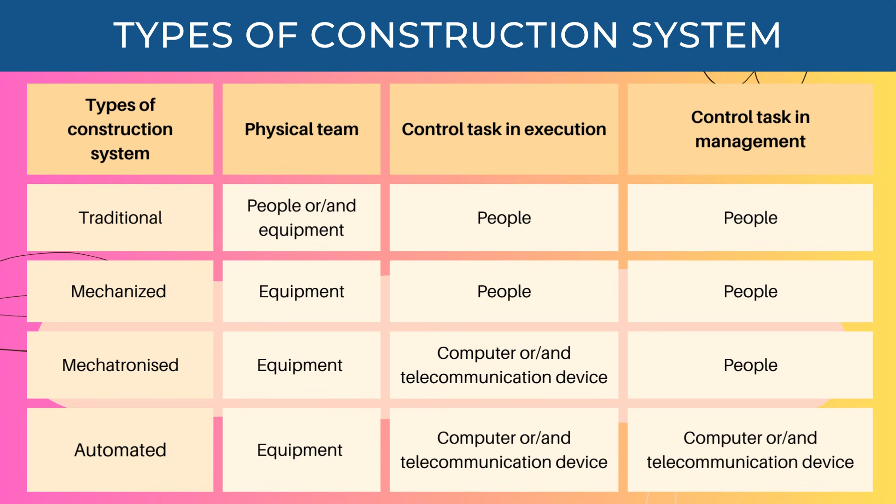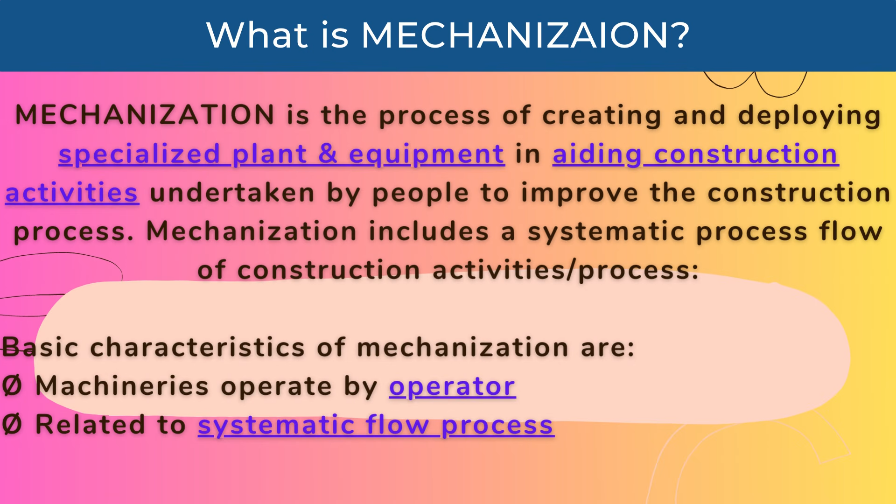What is mechanization? Mechanization is the process of utilization of specialized plant and equipment in aiding construction activities undertaken by people to improve the construction process. Mechanization includes a systematic process flow of construction activities. Basic characteristics of mechanization are: 1. Machineries operated by operator. 2. Related to systematic flow process. A systematic flow process is a way to visualize each subsequent step that your team goes through when working toward a goal.

What is automation? Automation is defined as a self-regulating process performed by using programmable machines to carry out a series of tasks with no or little people intervention in their normal operation. Basic characteristics of automation are: 1. Machineries are operated by programmable machines with no or little people intervention. 2. Related to self-regulating process. Self-regulated processes have built-in feedback characteristics that cause the process to tend towards self-regulation. An example is batching plant auto operation, grading by motor grader by new grading system of a self-regulating process.

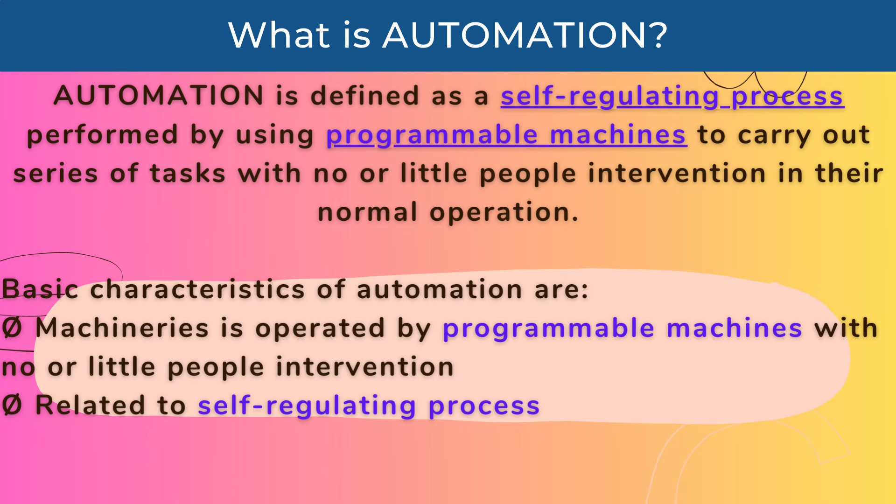What are advantages of mechanization? 1. Improve quality. 2. Improve safety. 3. Fast execution. 4. More productivity. 5. Increase profit. 6. Reduce construction cost. 7. Reduce manual work. 8. Reduce wastage. 9. High feasibility.

Friends, we will explain in depth about productivity, cost, quality of work and many other details for construction plant and machinery in upcoming video.

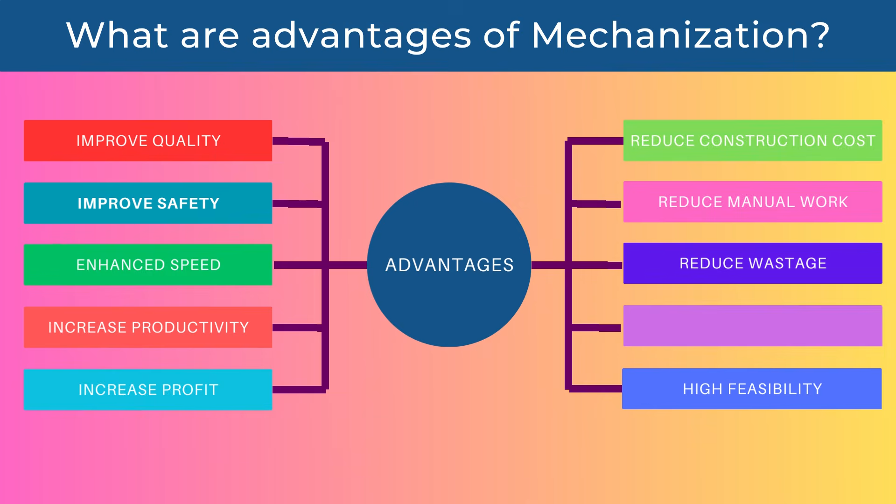Let us come to the topic. Type of construction plant and equipment. Construction equipment can be divided into two major categories: 1. Productive equipment and 2. Support equipment. Productive equipment describes units that alone or in combination lead to an end product: haulers, loaders, rollers and trenchers, etc. Support equipment is required for operations related to the placement of construction such as movement of personnel and materials: hoists, lighting sets, vibrators, scaffolds, etc. Project goal is to select the equipment combination that yields the maximum productivity at the best or most reasonable price.

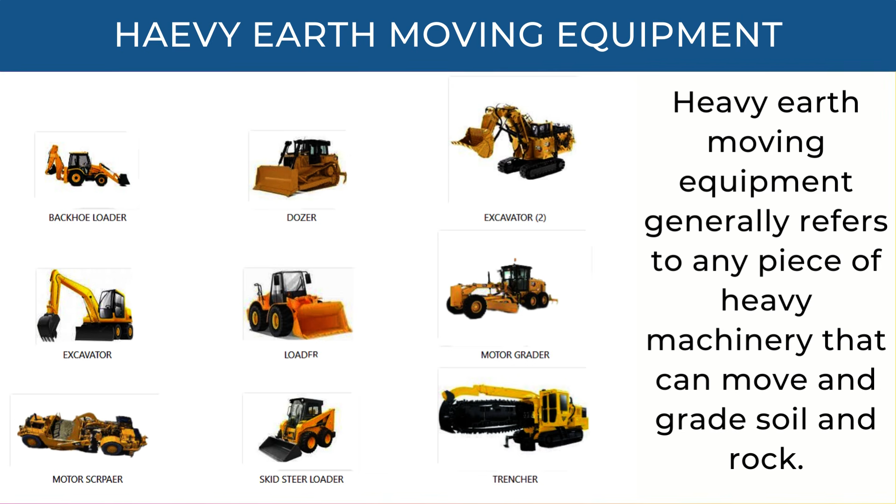Types of productive construction equipment. Productive construction equipment is divided into the following categories. 1. Heavy earth moving equipment. Heavy earth moving equipment generally refers to heavy machinery that can move and grade soil and rock. Example: backhoe loader, dozer, excavator, loader, motor grader, motor scraper, skid steer loader, trencher.

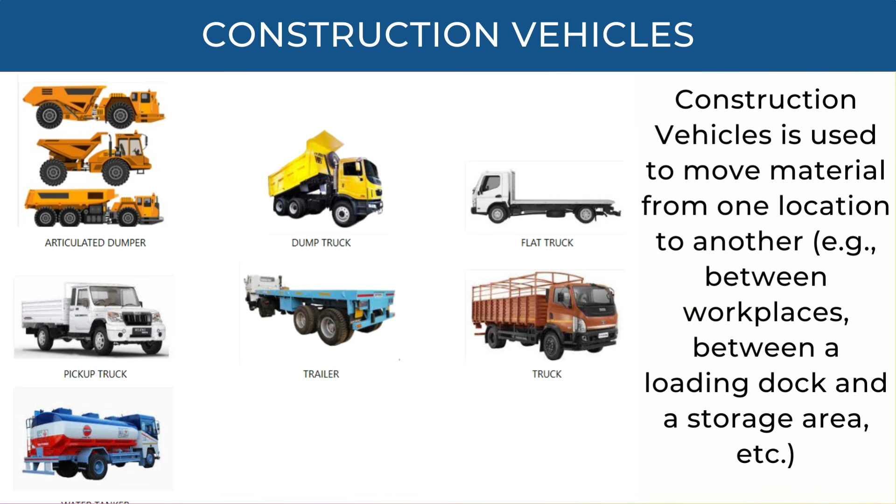2. Construction vehicles. Construction vehicles are used to move material from one location to another, for example, between workplaces, between a loading dock and a storage area, etc. Example: dump truck, articulated dumper, flat truck, pickup truck, trailer, water tanker. 3. Lifting equipment. Lifting equipment, also known as lifting gear, is a general term for any equipment that can be used to lift and lower loads.

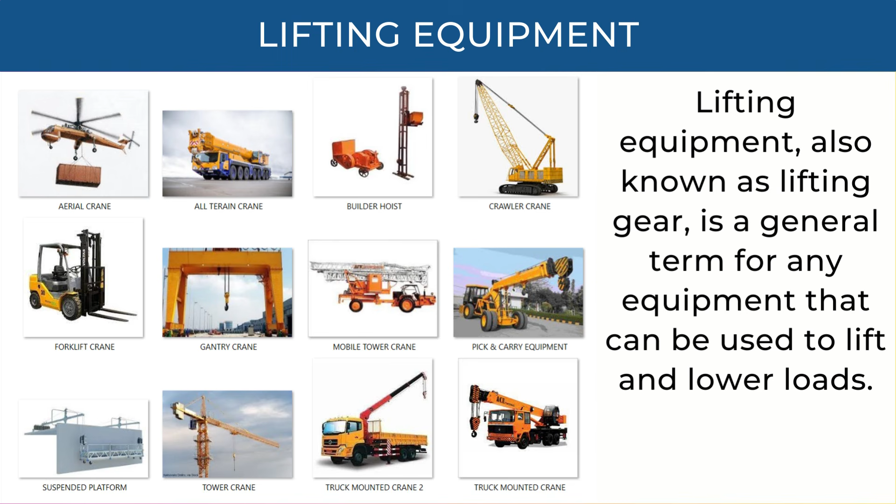Example: aerial crane, all-terrain crane, truck-mounted crane, crawler crane, forklift, gantry crane, tower crane, mobile tower crane, pick and carry crane, suspended platform, builder hoist.

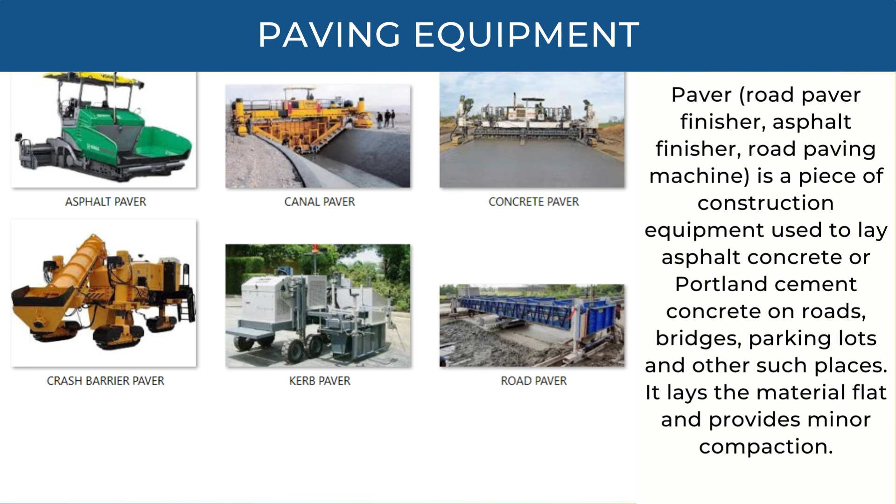4. Paving equipment. Paver is a type of construction equipment used to lay asphalt concrete or Portland cement concrete on roads, bridges, parking lots, and other such places. It lays the material flat and provides minor compaction. Example: road paver finisher, asphalt finisher, concrete paver, drain paver, canal paver, crash barrier paver.

5. Compaction equipment. Compactor equipment is a device that applies downward pressure on dirt, soil or gravel to compress the ground and fill in air pockets. There are 3 basic types of compaction machines: rammers, vibratory plates, and rollers. Example: soil compactor, tandem roller, pneumatic tire roller, walk-behind roller, plate compactor, rammer.

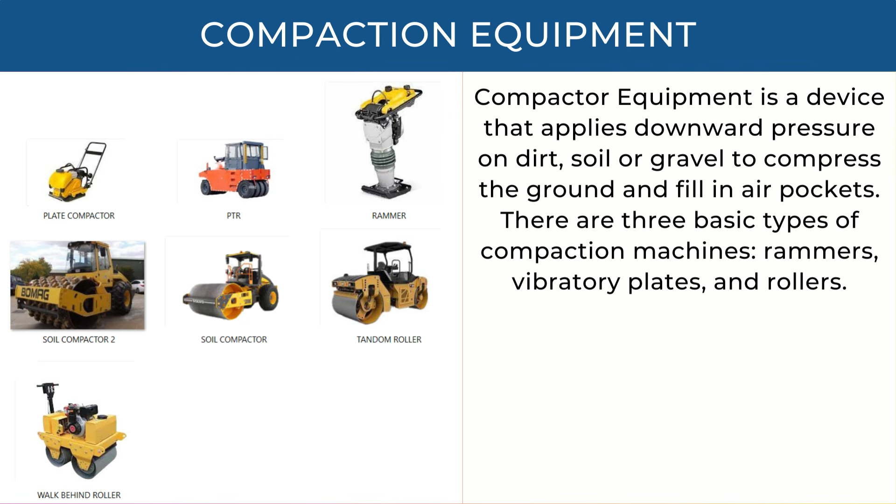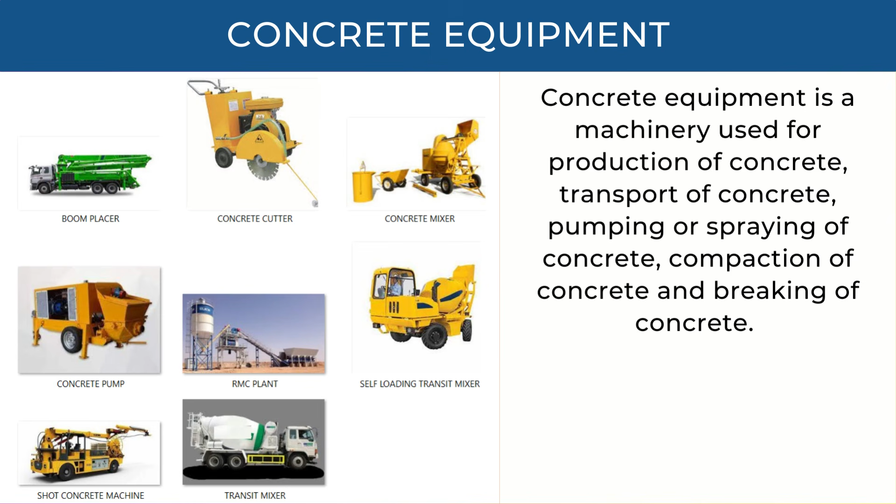6. Concrete equipment. Concrete equipment is machinery used for production of concrete, transport of concrete, pumping or spraying of concrete, compaction of concrete and breaking of concrete. Example: concrete pump, boom placer, transit mixer, self-loading transit mixer, concrete plant, concrete mixer.

7. Tunneling and drilling. Tunneling and rock drilling equipment is machinery used to create huge holes in the Earth's subsurface. The holes can be used to construct infrastructure projects, such as underground tunnels, or to extract minerals. Example: boomer, drilling machine, piling equipment, tunnel boring machine, rotary drill, surface drill.

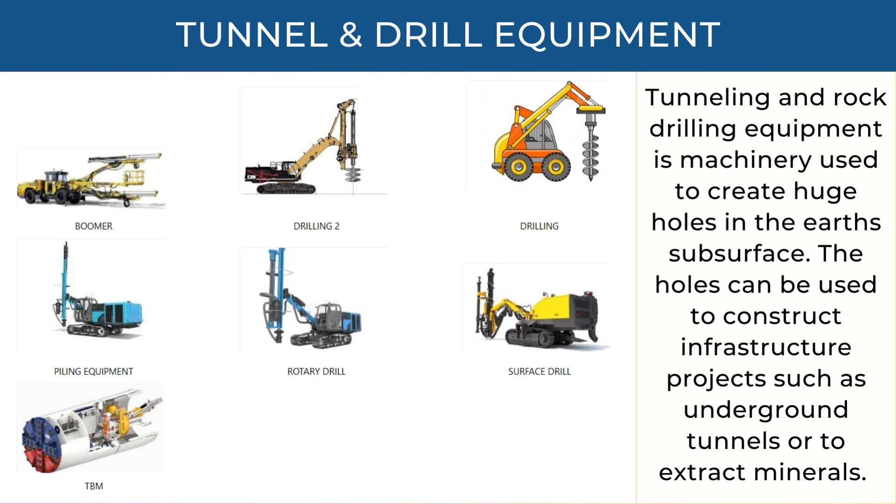8. Plant. Plant is taken as immovable property or property that has been attached to the earth, whereas machinery is machines that can be taken out of the factory on a short notice. But some plant is now coming with a mobile option also. Example: crusher plant, concrete plant, WMM plant, hot mix plant, sand washer.

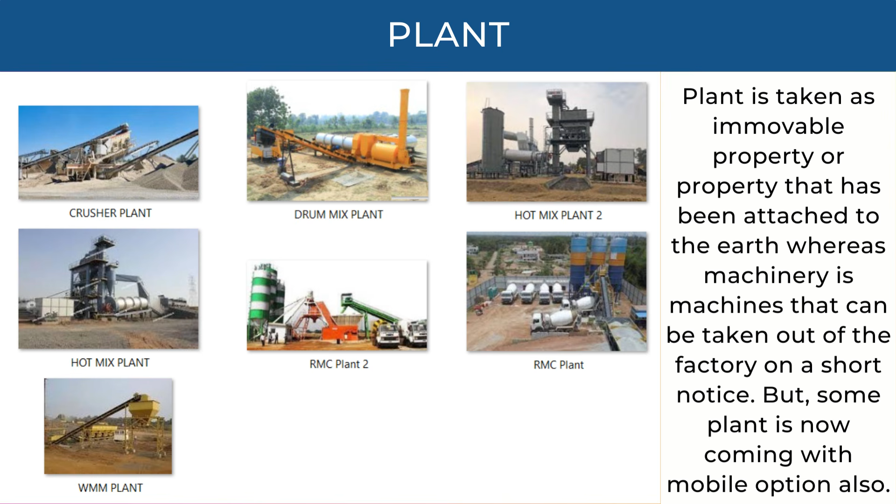Friends, we will explain in depth about construction plant and machinery in an upcoming video. For better understanding, this few-minute detail only provides a set of different plant and machinery.

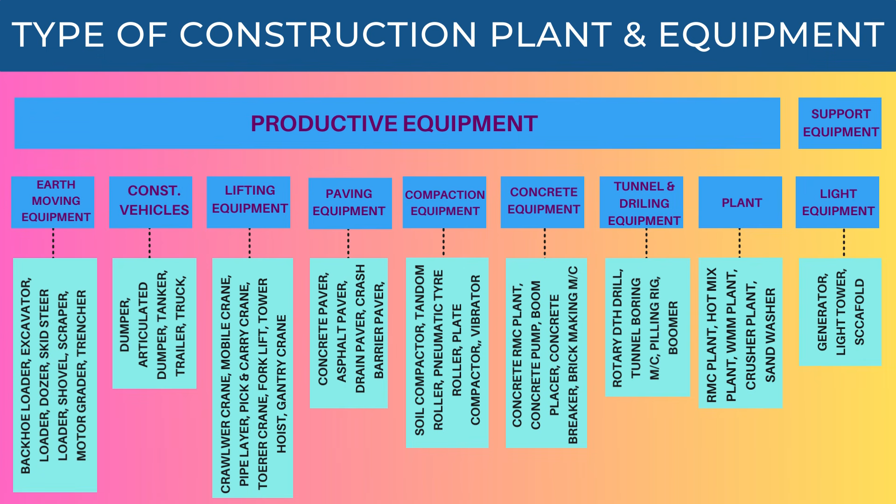Deployment of construction plant and equipment. Deployment of a fleet of construction equipment has a major impact on the profit of the project. We need to be aware of the following before mobilization of any construction equipment to site. 1. Financial impact. Selection and mobilization decision of equipment should be based on project duration and on financial indicators. These are cash flow statement, interest rate and time value of money, equivalence concept, internal rate of return, payback period. Systematic, methodological and coordinated decision is needed before mobilization of equipment for economic viability of the construction industry.

2. Work quality, quantity and period of execution. We have to consider total project BOQ, quality and project schedule before mobilization of equipment. 3. Maintenance and operational skill of staff required. Maintenance skills are skills required for proper inspection, diagnosis and solving problems of construction plant and machinery. They are also used to perform basic repairs or take preventative measures to get proper performance and productivity. If your equipment is well maintained, it's less likely to break down, which leads to increased uptime, more working hours for the equipment, fewer repair costs, and therefore increased revenue.

When people think of the qualities of a great machine operator, the first things required are good health, good depth perception, good hand-eye coordination, and attention to detail. Heavy equipment operators should be able to operate equipment safely and properly with the ability to operate at maximum capacity.

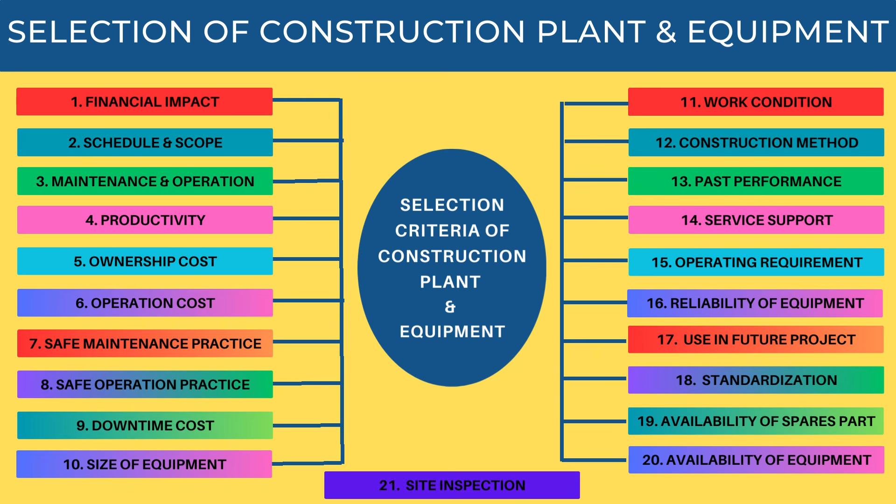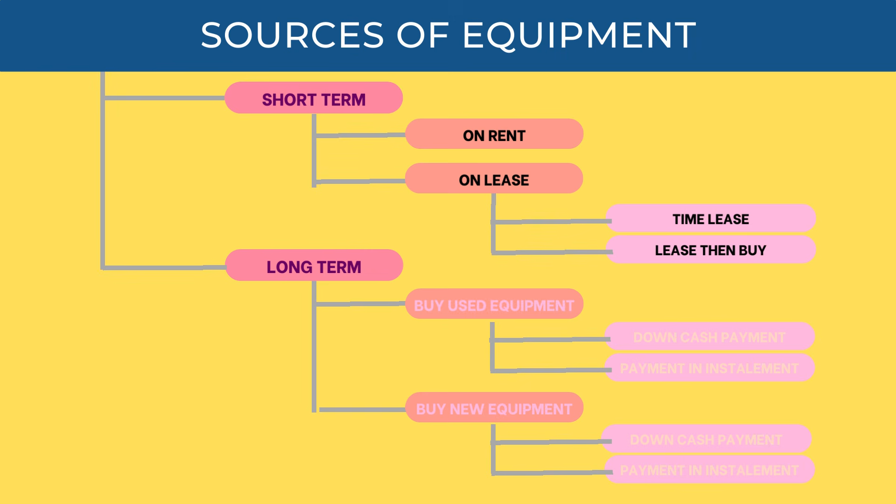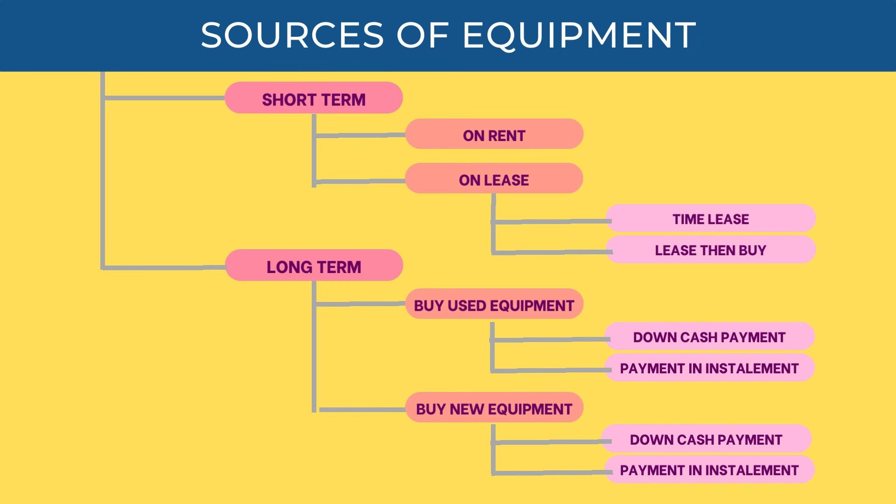Management of construction plant and equipment. Head plant and machinery is responsible for overall management of construction plant and machinery. Generally, the role of head plant and machinery is vice president or general manager. Head plant and machinery is supported by one or more senior managers and deputy managers based on total asset value of construction plant and machinery and based on number of projects.

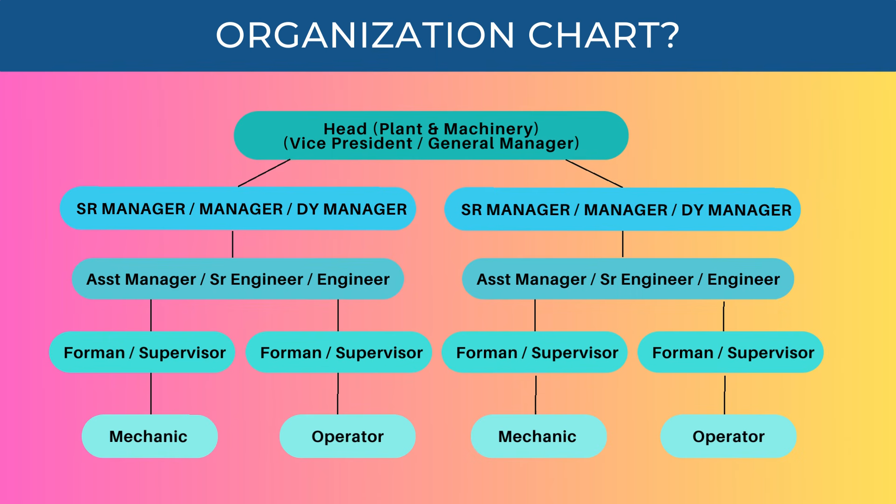One or more persons of role assistant manager, senior engineer, engineer report to every person of role senior manager and deputy manager. One or more persons of role foreman or supervisor report to every person of role assistant manager, senior engineer. A group of mechanics, operators and other operative staff report to the foreman or supervisor. Each role has specific responsibilities.

Friends, we will explain in depth about roles and responsibilities of construction professionals in plant and machinery in the next video. We need to understand that unless we are aware of our responsibility in a broad sense, we will not be able to perform well. Also, we will not be able to self-assess the set of required skills for better performance.